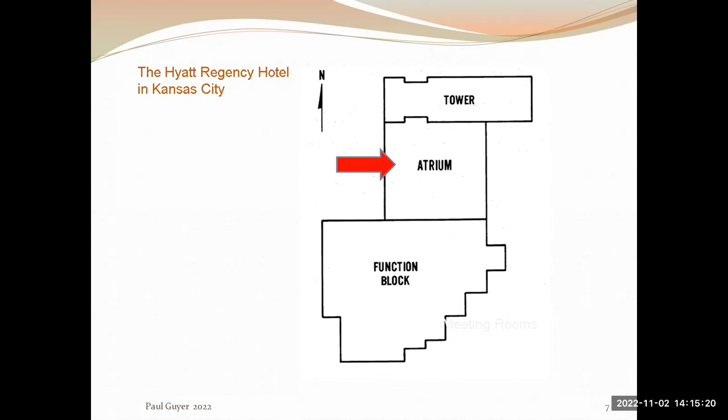It was an early advocate of it was an architect from, I believe it was Atlanta, Georgia, John Portman. He designed a number of hotels, as I understand things, for the Hyatt Hotel Company. And today, if you go into a number of Hyatt hotels that were built back in that era, you'll see these high atrium lobbies where it was a gathering place for guests to have a drink, chat, so on and so forth.

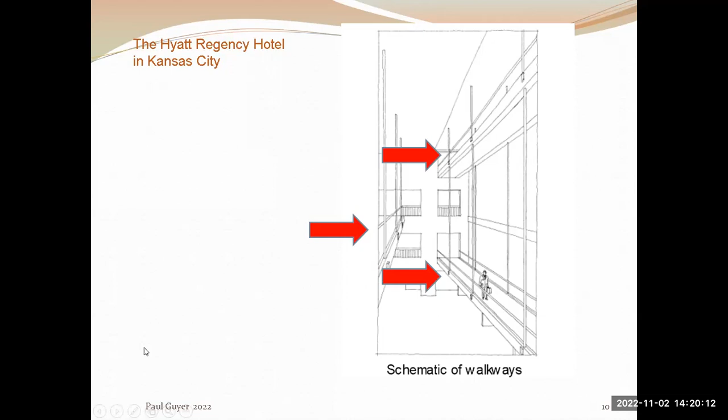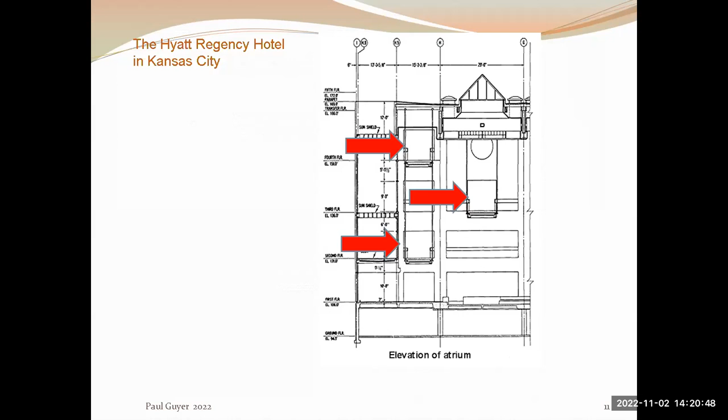Here is a cross section of the solution that was arrived at, through the atrium lobby. You see these aerial walkways at the second, third, and fourth floor levels. The walkways at the second and fourth floor level were on top of each other, and the one at the third floor level was offset. So this was the design for the atrium lobby.

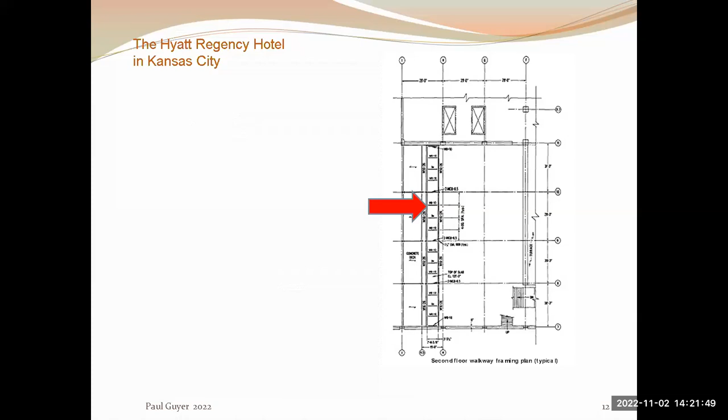This is just a picture of the framing plan for these walkways - structural steel members that supported the deck that people walked on, and there were cross beams as you see here. So pretty straightforward. This whole structure is suspended by hanger rods from the ceiling structure at the fourth floor level above the atrium lobby. Then the load is transferred from the hanger rods to the structure, and it winds its way around and gets down to the foundation.

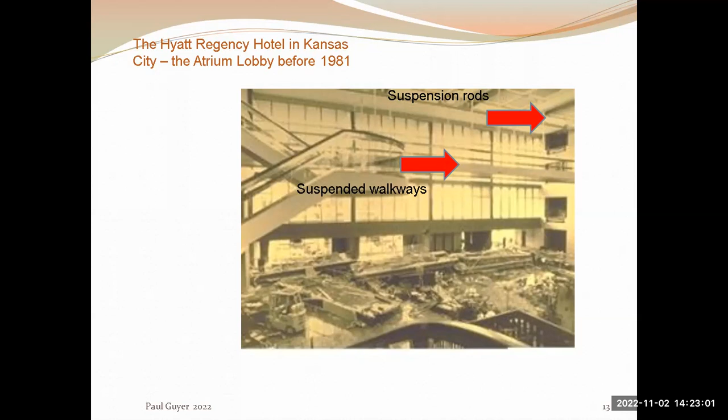Now let's talk about how this project came into being, the history of it, and pay particular attention to the number of actors who had a part in this project. It all began in 1976. Civic and commercial interests in Kansas City wanted to get a convention hotel constructed in their downtown area - a common civic interest in those days, and continuing today.

But hotels are kind of a difficult project to make work economically. So frequently what civic and commercial interests in a city that wanted to get a convention center hotel developed needed to do was find an investor who had a lot of money, who would put up the money to build the hotel. The well-known hotel companies, Sheraton, Hilton, et cetera, many years before got out of the business of building and owning hotels, and just turned themselves into operating companies.

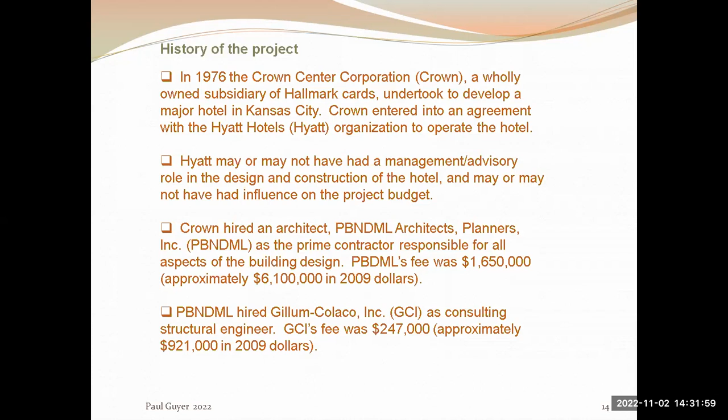So another entity is walking on stage, Gillum Colaco, a quote, consulting structural engineer. Gillum Colaco, GCI, subcontracted the structural engineering work to an affiliated firm, Jack D. Gillum and Associates, for an unknown fee, at least unknown to me. Gillum prepared approximately 60 drawings for the structural design of the project. Keep that number in mind, because that will be relevant. So Jack D. Gillum prepared about 60 drawings for the structural design.

And of course there were all sorts of other subcontractors to PBNDML: mechanical engineers, electrical engineers, fire protection engineers, civil engineers, et cetera, et cetera, et cetera. So a lot of people from various organizations are getting involved in this project. And this is, in my view, where the project began to go off the rails -- a large number of people, entities, business entities with different motivations, and sometimes conflicting motivations.

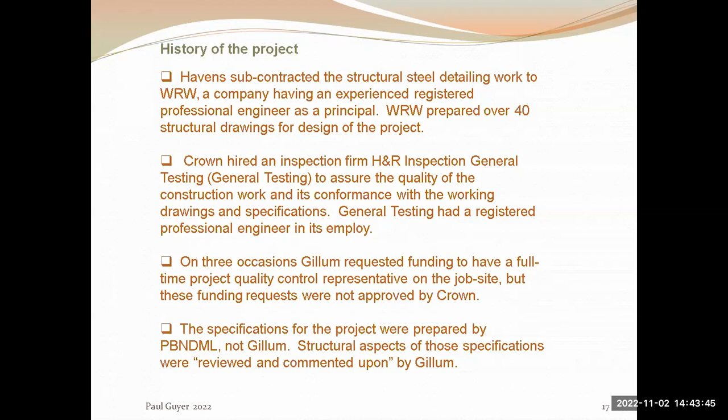So a third data point is that while the building was under construction, on October 14th, 1979, a portion of the atrium ceiling structure collapsed. This collapse occurred on a weekend, and fortunately there were no workmen or people in the building, so there were no fatalities or injuries.

But a portion of a structure collapsing should be an awfully big wake-up call for everyone involved in a project. That clearly indicates something is not going smoothly, correctly with the management of this project. Something's wrong. So the structure, or a portion of it, the ceiling structure, collapses while it's under construction.

Crown, the owner, retained an independent structural engineering firm, an entity called Seiden Page, to investigate the cause of the roof collapse. Seiden Page identified the cause of the collapse: design changes were made by Gillum, and that was the end of Seiden Page's involvement in the project. Seiden Page was not retained to investigate the overall adequacy of the design.

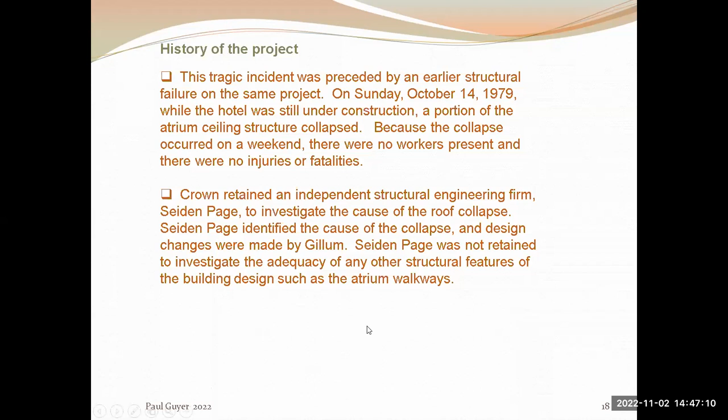Did PBNDML not want to pay Seiden Page to do a comprehensive structural review? Did the construction management company not want to pay Seiden Page to do this extra work? Did Crown not want to pay Seiden Page to do this work? What was the Hyatt Hotel Company doing in all of this? The Hyatt Hotel Company probably had substantial control over the budget on the project.

So you've got all of these people participating in this project. They've got different motivations. Essentially, a construction project like this, a design and construction project like this, is a pushing and shoving contest to see who can make the most money out of the project, candidly.

Then the failure, the structural failure - the path to the structural failure was set. The construction of the building was completed, and the hotel opened for business in July of 1980.

In July of 1981, there was apparently a rowdy social function going on in the hotel. There were 1,500 people present at this social function, which was a weekly dance contest held in the atrium lobby, sponsored by a radio station, I believe. There were large numbers of people in the atrium lobby dancing and socializing on the ground floor, and also on the 3 suspended aerial walkways.

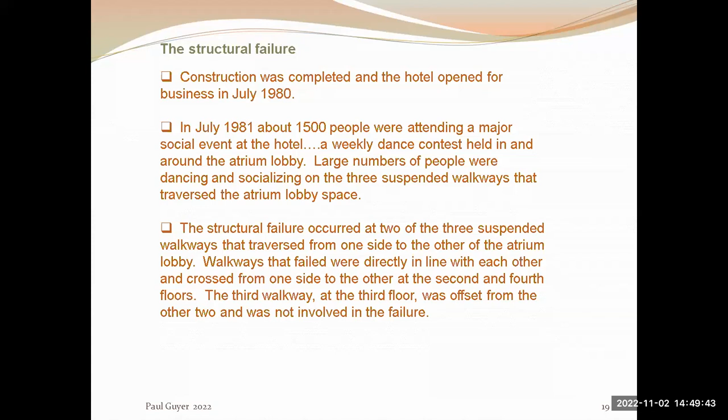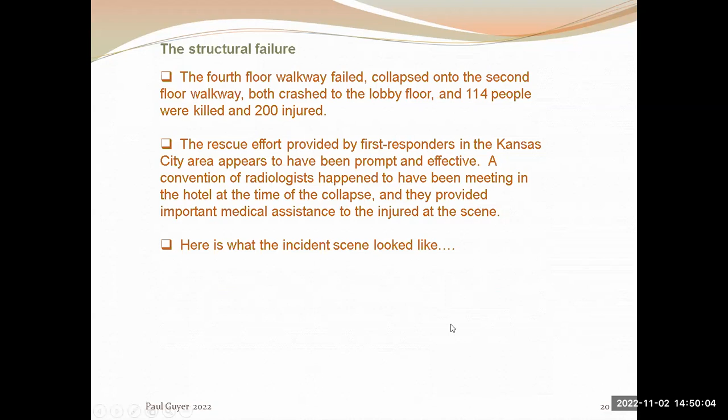As previously indicated, there were 114 people killed and 200 injured. This is what the scene looked like after the failure.

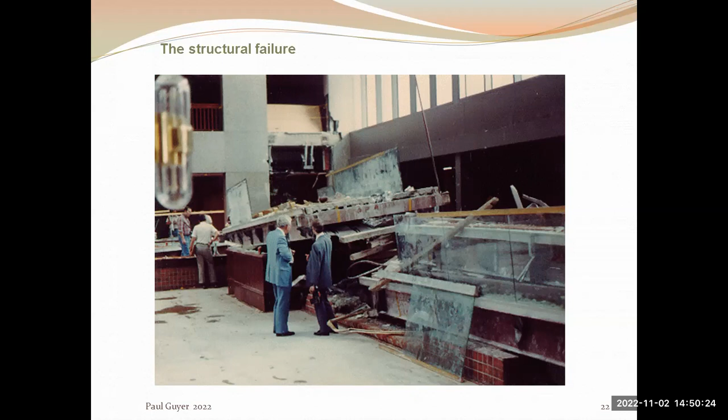You get a scale of these structural elements because you've got people in the picture, so you can see that these were big structural elements.

This photo shows the 3rd floor walkway remaining in place, suspended by the hanger rods from the ceiling structure at the 4th floor level. Down below at the 1st floor level is the debris from the collapse.

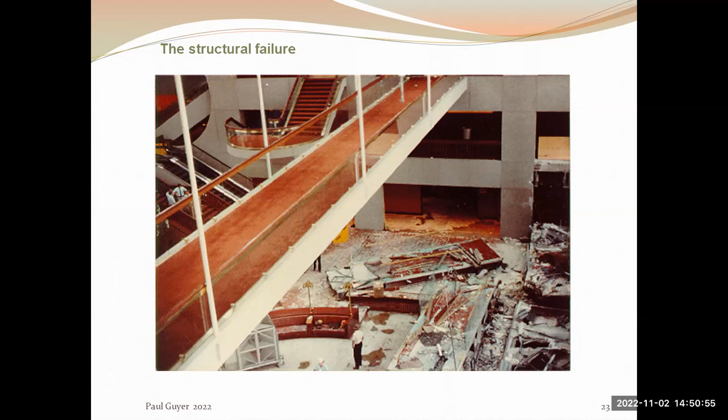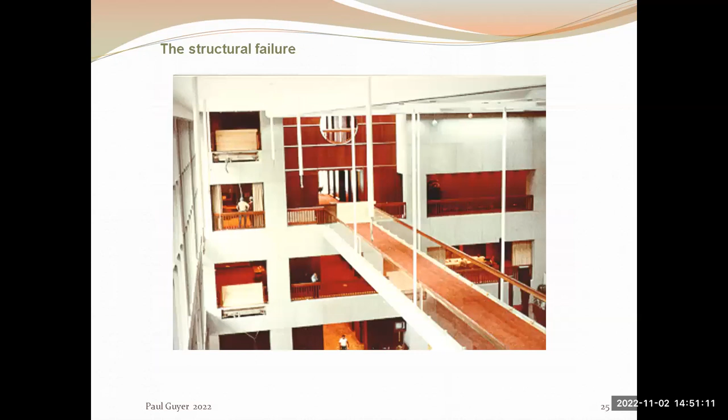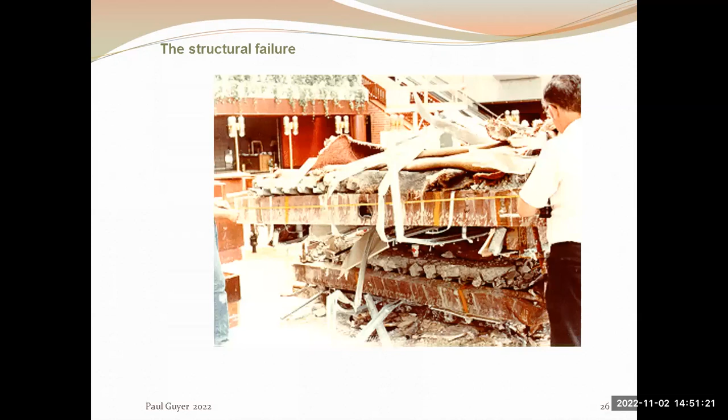Here you see the failed suspension rods at the 2nd and 4th floor levels. Here is the 3rd floor walkway remaining in place. More pictures to show the magnitude of the debris - these were not small structural elements.

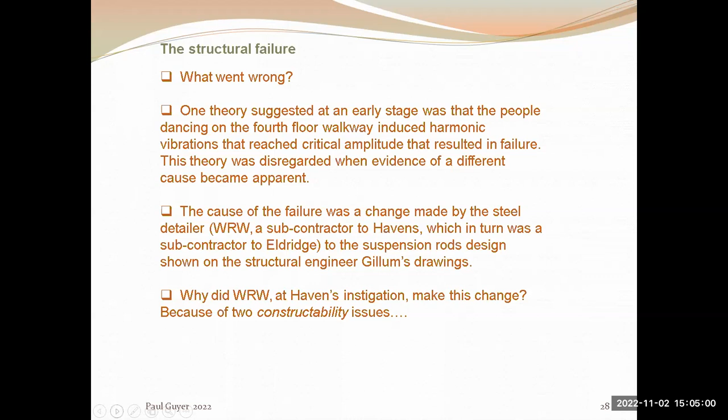Let me get my slides going here. The design that Gillum provided for the suspension rods and their connection to the walkway structures was, from a constructability standpoint, poor, no question about it. It required suspension rods approximately 40 feet in length, and the rods would have to be threaded for approximately 30 feet of their length in order to install the nut on the rod that supported the fourth floor walkway. You'll see this in these pictures shortly here.

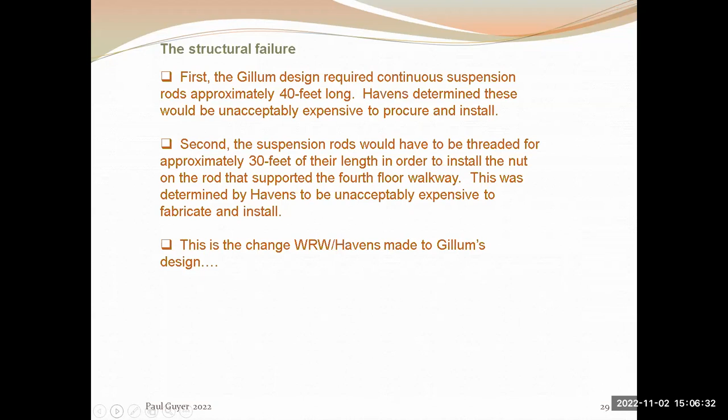This was, from a constructability standpoint, certainly not a good idea. Havens directed WRW to change that detail on the fabrication drawings. This was Gillum's design for the connection of the suspension rods to the deck structure at the fourth floor level.

The suspension rod comes down from the ceiling of the fourth floor structure, and it passes continuously through a hole drilled in the cross beams, which were a box beam fabricated by welding two C channels together. So the suspension rod is continuous from the fourth floor ceiling level down to the fourth floor walkway deck structure level, where the detail is what you see here.

Then the suspension rod continues continuously down to the second floor level, and the connection is similar at the second floor walkway level. So a very long rod, one that would require threading of the lower 30 feet or so in order to put in place the nut that you see in this sketch, on which the fourth floor walkway deck structure rests. So the load from the fourth floor walkway deck is transferred directly to the continuous rod. This was Gillum's design.

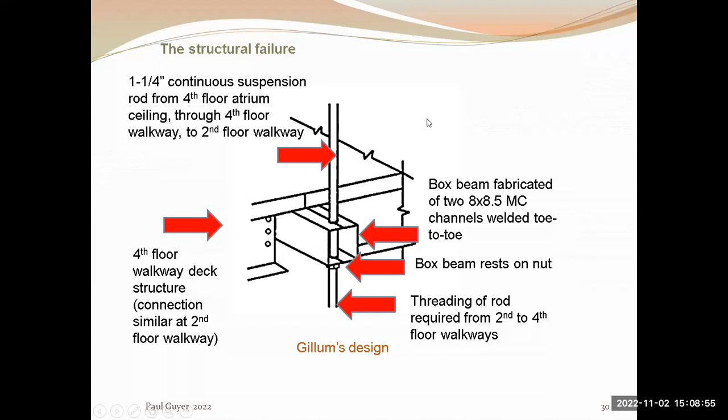Havens took a look at this, went ballistic - this isn't funny, but went ballistic - and said to WRW, change that connection detail. So at Havens' direction, WRW changed the connection detail at the fourth floor walkway level to what you see here.

A rod continues down from the fourth floor ceiling structure to the fourth floor walkway structure, and is connected as you see here. The load is transferred from the fourth floor walkway deck to the nut on that rod. But then, to eliminate the need for the 40-foot long rod and the 30 feet of threading, a second rod was the solution that Havens and WRW made.

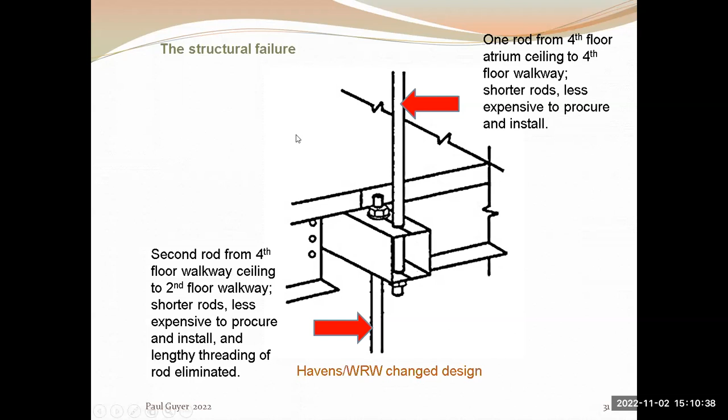A second rod is offset from the first rod, and that second rod then drops down to the second floor walkway level, and the second floor walkway is connected to that second rod. So this is the detail that Havens and WRW made to Gillum's design.

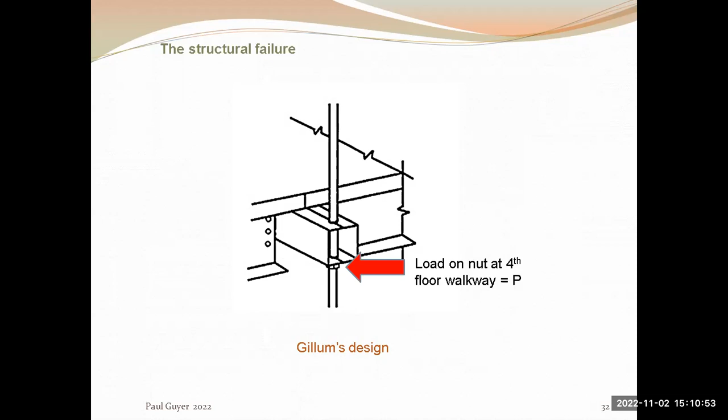With Gillum's design, the load on the nut at the fourth floor walkway was whatever it was, P. With Havens and WRW's design, however, the load on the nut at the fourth floor walkway is now P plus P, and the load from the second floor walkway is transferred to this second hanger rod, which then transfers the load through the box beam to the first rod, which then continues up and is attached to the ceiling structure at the fourth floor level.

So this was a change that Havens and WRW made to Gillum's design.

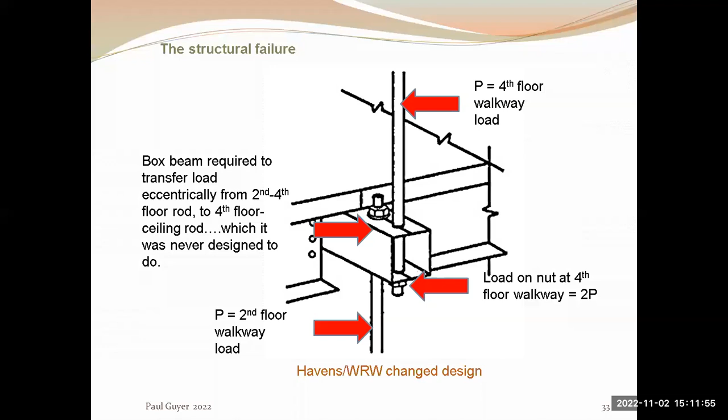Now there was another consideration here: Gillum's original design sized the suspension rods such that they were strong enough to support only 60% of the imposed load based on code allowable stresses. This also was a mistake by Gillum, but not a fatal mistake, not a mistake that caused the failure, for the reason that code stresses are around a third to a half of yield.

So even though Gillum's rods were not capable of keeping the loads beneath those allowed by the code, it was not a fatal mistake.

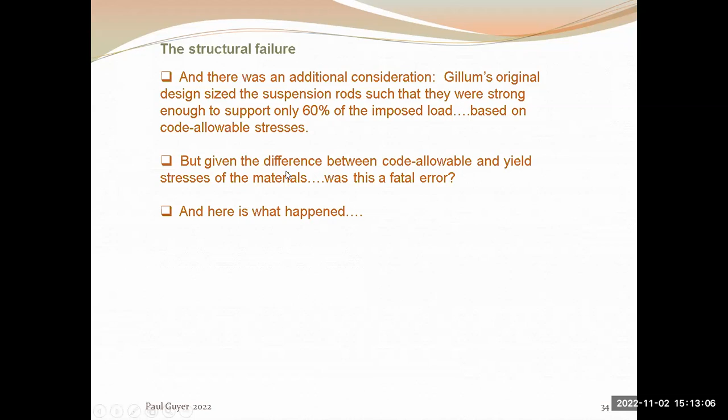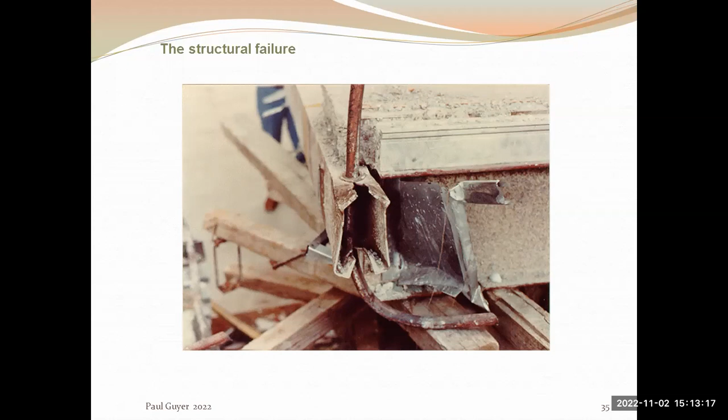Here is a picture of failure. What happened at the fourth floor level? The rod pulled out. More close-ups, details here.

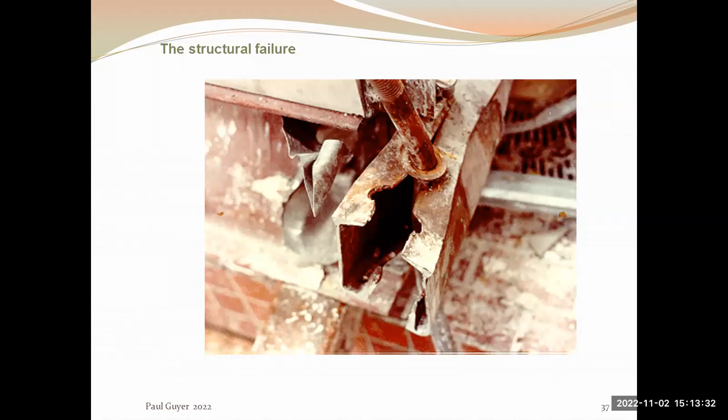So now the finger pointing begins. Havens said that they notified Gillum of the change by telephone. Gillum denies having received any such telephone call. Havens submitted over 40 steel fabrication drawings to Gillum for review. Included on one of these drawings was the fatal change. Gillum reviewed and returned the drawings stamped, quote, 'reviewed only for conformance with the design concept and for compliance with the information given in the contract documents,' end quote.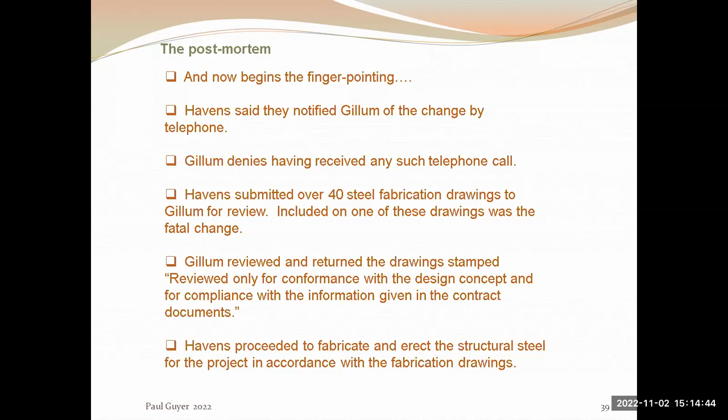A typical stamping for shop drawings. Havens proceeded to fabricate and erect the structural steel for the project in accordance with the drawings that it had prepared, Havens and WRW.

A data point here in the finger pointing phase is that several participants in the design and construction process purported to have told Gillum of concerns they had about the safety of the proposed change, including the construction detailer, WRW, the steel fabricator, Havens, the master designer architect, PBNDML, and a technician of some sort.

Now, is there anything interesting about these allegations? Well, what's interesting is that Havens and WRW made this change, and then, according to them, they called Gillum and said, 'hey, we just made a change to your design, but we don't think it was safe.' I mean, that's just nonsensical.

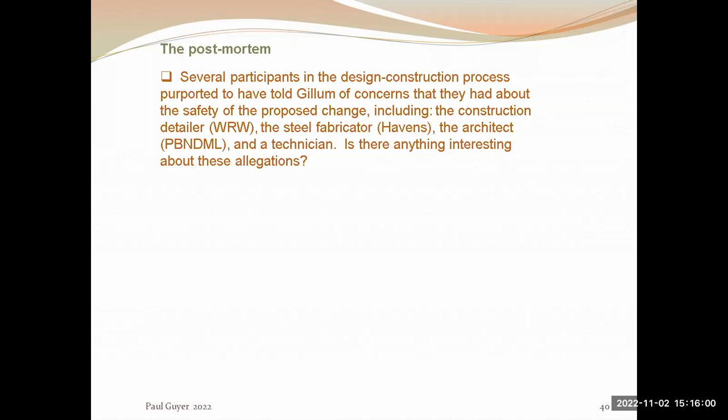This was an incident of great national notoriety. It was front page stuff in newspapers all over the country. Very high profile.

Those who were leading the investigation decided that the design needed to be reviewed by an entity of the highest degree of technical competence. It was determined that entity was what at that point in time was known as the National Bureau of Standards, and today it's the National Institute of Standards and Technology. The National Bureau of Standards was the lead agency in the technical investigation following the collapse.

By the way, a number of years ago, I had some involvement with NIST, the National Institute of Standards and Technology, and I was very impressed by their campus. It's like a college campus devoted entirely to technical issues of one sort or another.

So the lead in the technical review of the design was the National Bureau of Standards. It concluded in its report that the design change which led to the failure at the box beam nut suspension rod connection was due to that design change, which WRW Havens made to Gillum's design. It was, according to the National Bureau of Standards, contributed to by the failure to design the suspension rods to code approved stresses.

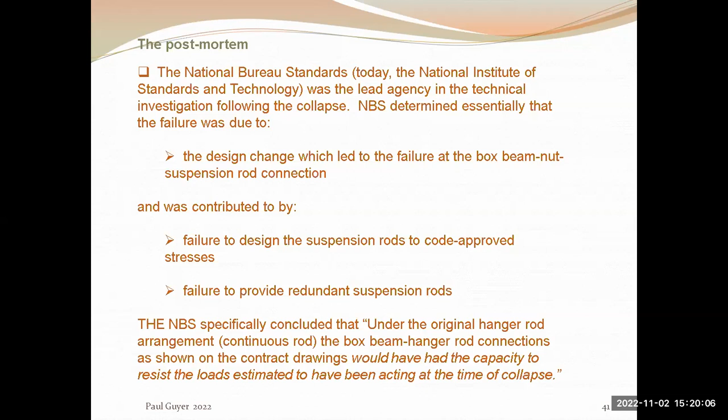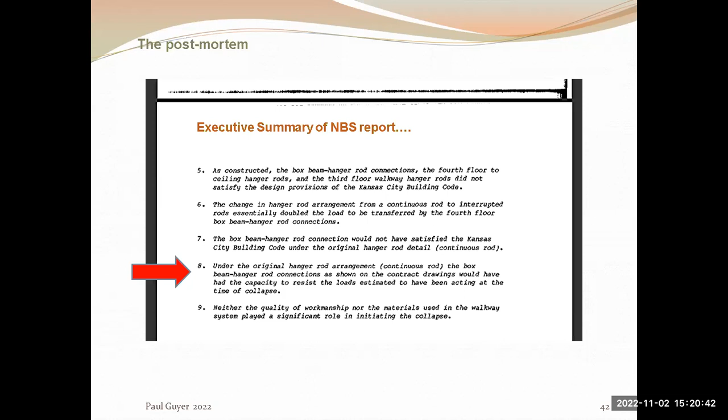It was due to the change that Havens and WRW made. And here is the executive summary, a cut from the executive summary of the National Bureau of Standards report, which says just what we got through saying: under the original hanger rod arrangement, continuous rod, the box beam hanger rod connection as shown on the contract drawings would have had the capacity to resist the loads estimated to have been acting at the time of collapse. End of story.

So these additional slides here are just a little bit of historical discussion of why the practice in structural engineering developed over time, whereby the structural design is not all done by the structural engineer. The structural engineer, probably due to economic pressures, wanted to get rid of the workload of designing the connections. So the nominal structural engineer sizes the beams and the columns and so on and so forth.

But then the design of the connections of the beams to the columns and to the decks is left to the construction fabricator and steel detailer.

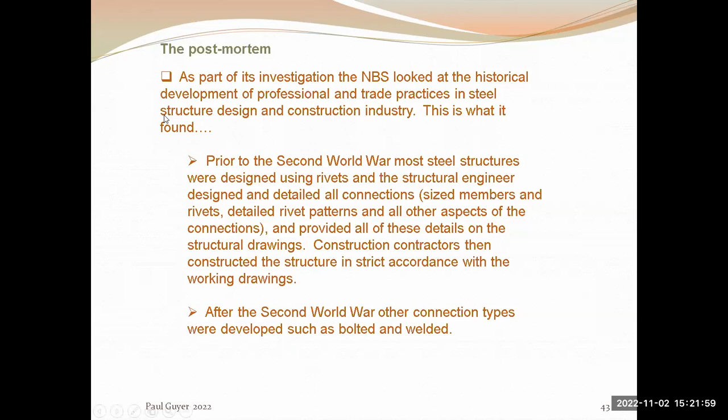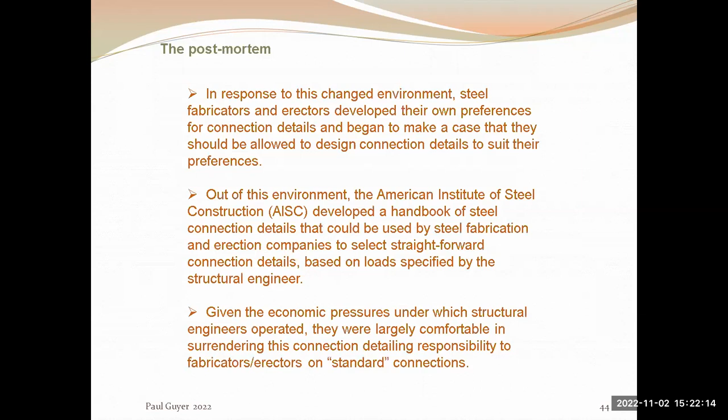So finger pointing. Now the National Bureau of Standards has clearly concluded that the failure was not due to Gillum's design, but rather was due to the changed design that was made on the shop drawings by Havens and WRW.

But the Missouri Registration Board, at the time of this incident, registration boards all over the country were running around in circles saying, oh my goodness, we could never have this happen in our state, and we need to assure the public in our state that we're right on top of this thing and that we're going to really hold our registered professional engineers to a high standard.

For what it's worth, back at that point in time, I happened to be in close contact with the California Registration Board, and I know they were, like I say, running around in circles. We've got to find someone here in California that we can convict of some kind of negligence, so that the public will have confidence in our government agency.

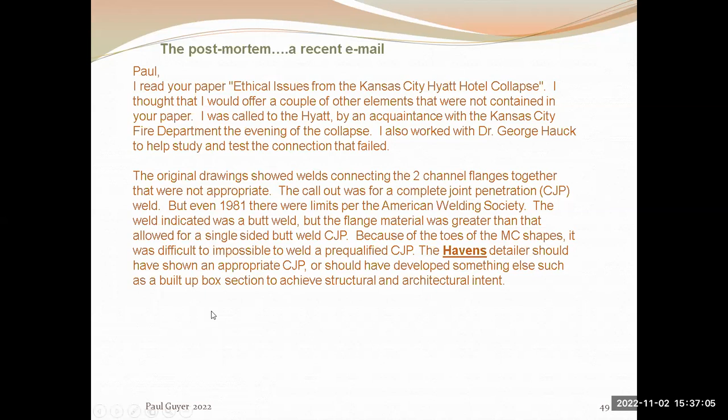Gillum's registration was canceled, and in essence his career was not completely damaged because he apparently, according to the record, was practicing in California under a California registration.

Now, was this disaster preventable? Clearly, yes. If Havens WRW had properly designed the changed detail, and also if the improperly changed detail had been noted and corrected by Gillum, yes, that is true also.

Other actions that may have prevented the collapse were if Gillum had provided redundant suspension rods, and if Gillum had sized the suspension rods in accordance with code approved stresses. All correct statements, no question about it. No question that Gillum was guilty of some sloppy work in checking, or failing to catch the change on the shop drawings.

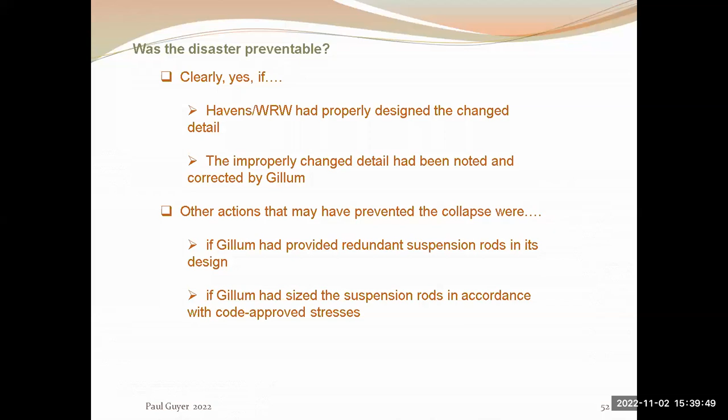But bear in mind that WRW had a registered professional engineer who I think owned the firm, and also that Havens held itself out in its advertising as being capable of not only fabricating and erecting steel, but of doing the engineering of steel structures. So the postmortem placed all of the blame on Gillum.

But what is the responsibility of Havens, which held itself out to its customers as providing engineering services? What's the responsibility of WRW, which designed the change under the direction of the registered professional engineer that owned the company or was on its staff? What's the responsibility of the master designer, PBNDML, which held itself out to its customers as being the master designer responsible for all aspects of design?

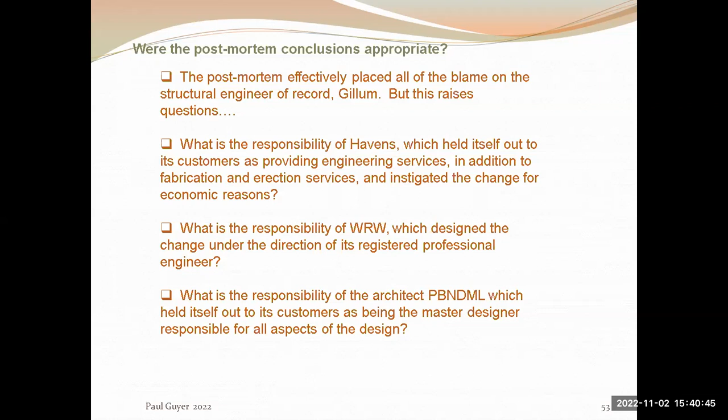What's the responsibility of Eldridge, which held itself out as responsible for all construction, including that of its subcontractors, Havens and WRW? What's the responsibility of the owner, Crown, which did not provide additional structural engineering funding for structural engineering review by Seiden Page after the earlier atrium collapse, and after Gillum had recommended and requested funding three times for a full-time inspector at the job site?

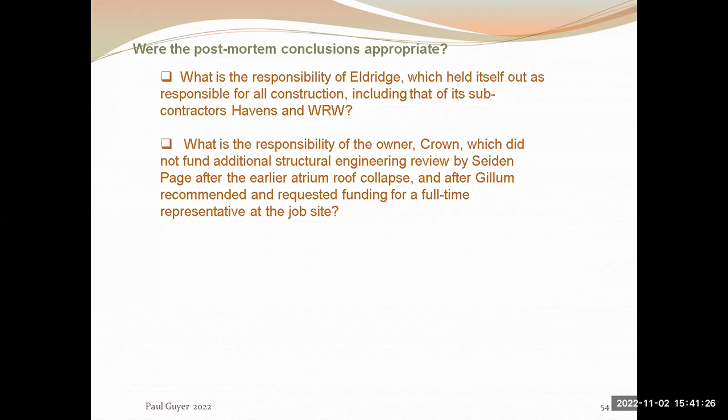We need to recognize the economic pressures that everyone in a project are under. And the engineering profession immediately, for public relations purposes, decided that it needed to show that it was being vigilant in protecting the public.

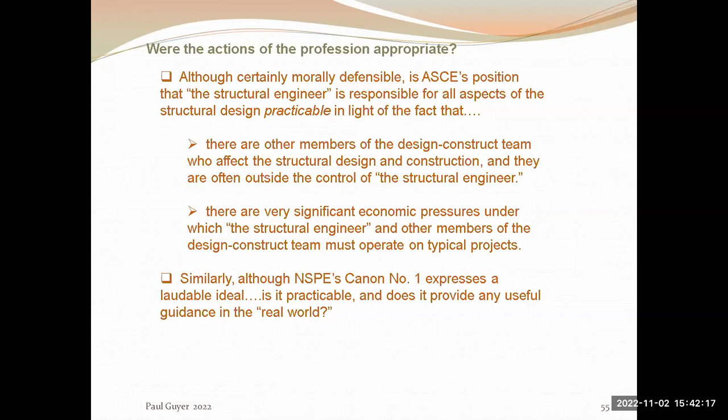NSPE created something called Canon number 1. Both it and ASCE came out with pronouncements that the structural engineer is responsible for all matters of safety as far as the structural design is concerned. That's a nice, naive way to look at things, but I think that it simply is not taking into account the huge number of people and companies that are involved in design and construction of projects such as this, and the economic pressures that they are all under.

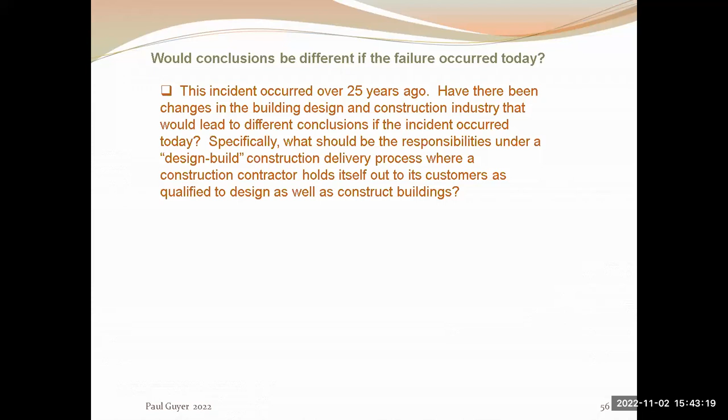Yes, it would be nice if they were perfect people, but they're not. So here are some, in my view, realities.

First of all, the building design and construction process is highly complex. It's not only technically complex, it's organizationally complex. It involves many people with different capabilities, motivation levels, and economic objectives.

Point number 2, I think that we've got to keep in mind: people always make mistakes. It's human nature to make mistakes. Any process where people are involved needs to recognize this.

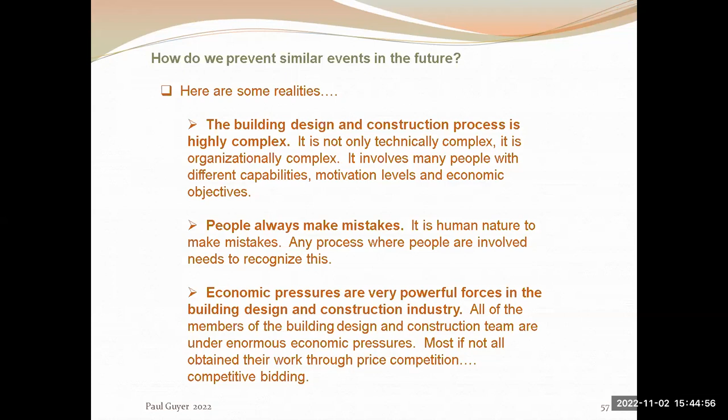A third reality is that economic pressures are very powerful forces in the building design and construction industry. All of the members of the building design and construction team are under enormous economic pressures. Most, if not all, obtain their work through price competition, competitive bidding, either formal or informal, where a general contractor calls up five plumbing subcontractors, says give me a price to do the plumbing on this building, and then he selects the lowest price. And it's axiomatic that someone cannot be held responsible for achieving an objective without commensurate authority.

We need to recognize that although all members of the design and construction team do not have the same level of expertise, all do have some level of expertise. A mechanical engineer might have looked at these shop drawings and said, something looks funny here, maybe we ought to take another look at this. Or a technician or a construction subcontractor.

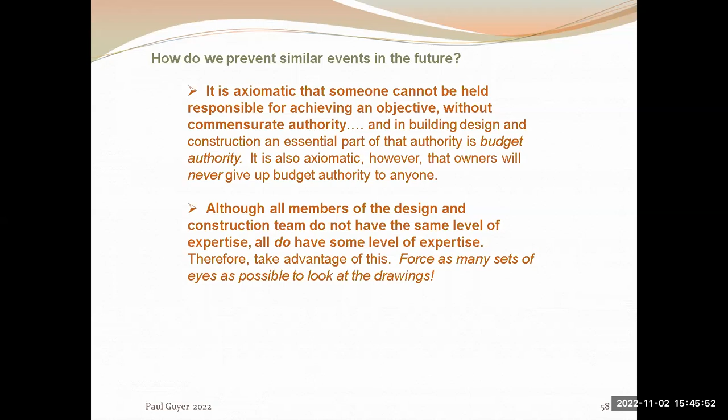You need to have certain realities in place, in my view, on a construction project. You need to have a clearly defined organizational structure, and clearly defined and enforced procedures, that force as many sets of eyes as possible within this organizational structure and these procedures to at least look at the relevant documentation on a project - the drawings, specs, change orders, shop drawings, and so on - because somebody may catch an error like this.

An approach that I am a big advocate of on substantive design and construction projects is an independent constructability review. In other words, you bring in a completely independent company or perhaps a consortium team of individuals who have a high level of expertise at building design and construction, to independently review the drawing specifications and shop drawings to look for constructability issues or safety issues. So an independent constructability review, I think, is a very important tool.

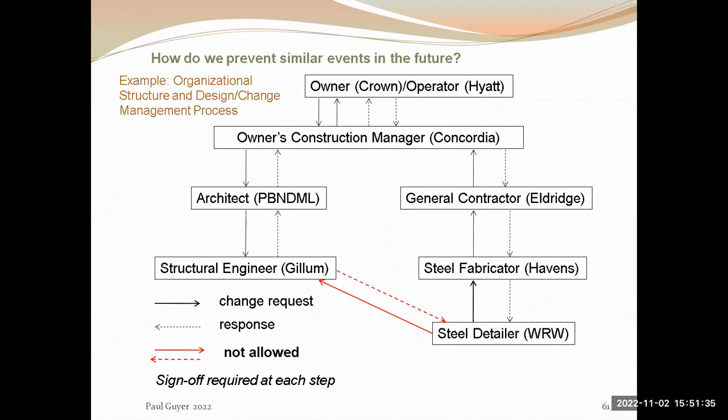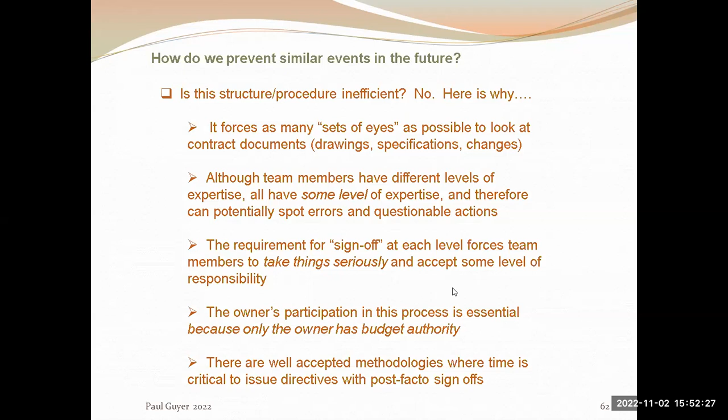So that's kind of the idea - force as many sets of eyes as possible to look at the contract documents. Recognize that team members have different levels of expertise, but all have some level of expertise and therefore potentially can spot errors. The requirement for sign off at each level forces the team members to take things seriously and accept some level of responsibility. The owner's participation in this process is essential because only the owner has budget authority. And there are well-accepted methodologies where, when time is critical, you issue directives with post facto sign-offs. And then there's the concept of the independent constructability review.

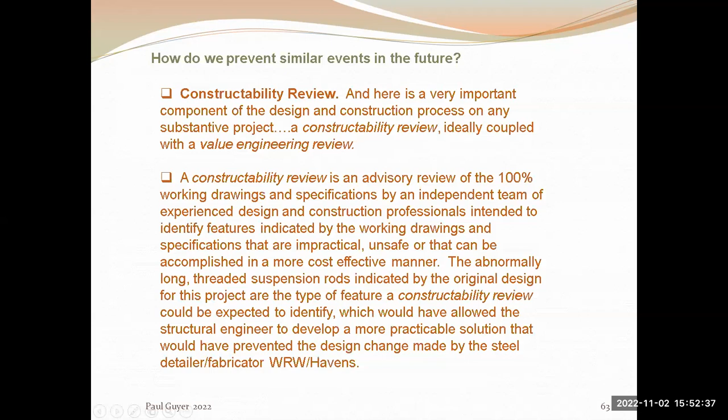Okay, to summarize: to prevent incidents like this in the future, force as many sets of eyes as possible to look at the drawings and specifications, force the team members to take things seriously by requiring sign off, and convince the owner to fund an independent constructability review.

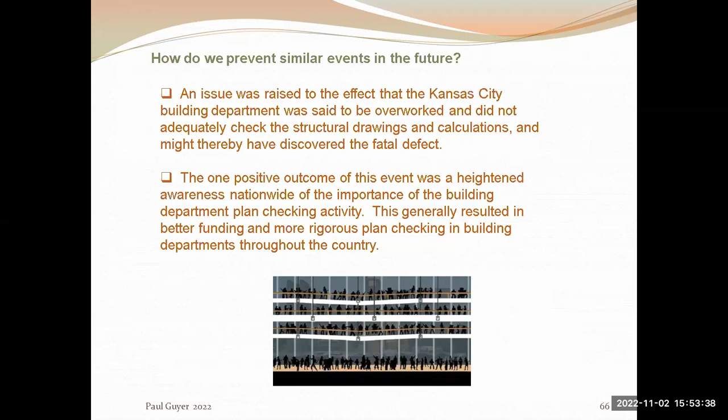One positive aspect that did come out of this incident is that building departments across the country began to upgrade their drawing reviews when building permits are applied for. This has been very constructive, and the evidence of that is that there have not been any incidents of this magnitude since this one.

So that is the end of our time, and I hope you have found this a little bit interesting. It will allow you to think about this a little bit more on your projects as they come across your desk.